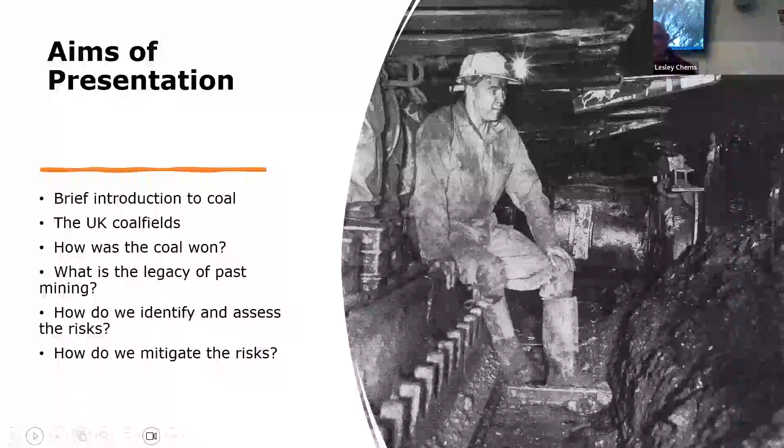All right. So I'm going to talk to you today: brief introduction to coal, where the UK coalfields are, how the coal was won, what is the legacy of the past mine workings across the UK, and particularly in South Wales, obviously. How do I identify and assess the risks, and then how do we mitigate the risks?

So the basic question, what is coal? I'm sure most of you know, but there is a member of our esteemed government who this week demonstrated that he doesn't really understand what coal is. It's a sedimentary rock formed by compression, lithification of organic materials, and this is the bit which that gentleman didn't seem to understand, over millions of years. UK and American coal is obviously from the Carboniferous period, which I'm sure many of you know, but it's not like that across the whole of the world. In Australia, for example, the coal is Permian.

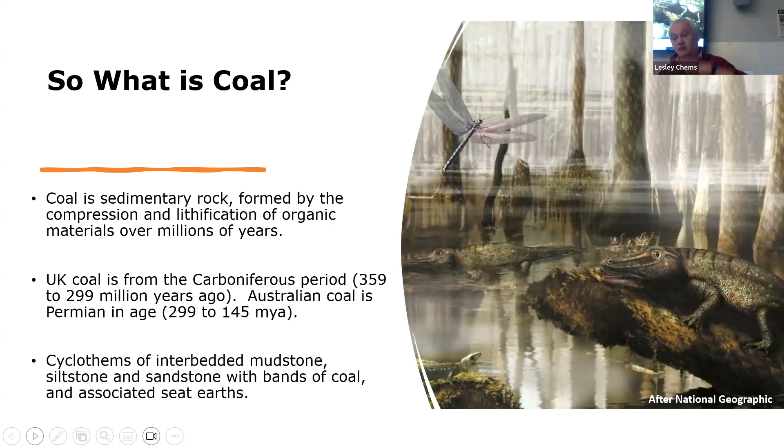The coal was laid down, the plants rotted, and then covered by sand, mud, silts. So you have an interbedded sequence of mudstones, siltstones, sandstones, the coal seams, and also seat earths. Now, seat earths were underneath the coal seams, and they're effectively the topsoil that those plants grew in. But those were lithified as well. You still see those in the succession. A whole sequence of those. So you have a series of what are known as cyclothems, one above the other in this succession.

I was at a webinar earlier this month, or last month, and the guy giving it said, oh, coal's coal. That's not true. There are four main ranks of coal. Lignite, which is soft brown, combustible, sedimentary rock. It really is just one step up from peat. It's the lowest rank, lowest heat content. We don't deal with it much in the UK, but places like Germany, there are quite a lot of lignite seams. Subbituminous is the next one up, increased carbon content, higher heat content.

Next one again is bituminous. That's further increased carbon content. It's got a high volatile content, which makes it less good to burn than the top ranks, but it is the most abundant rank of coal. So most coal seams across South Wales and the coalfields would be bituminous coal. Top rank is anthracite. That's the highest carbon content. That's the stuff the coal man used to deliver in the 60s, 70s, and possibly 80s. It's got the highest energy density, the highest ranking, and it is the most sought after and profitable. Now, this matters because when you're looking at a coal seam, if it's anthracite, it's far more likely to be worked.

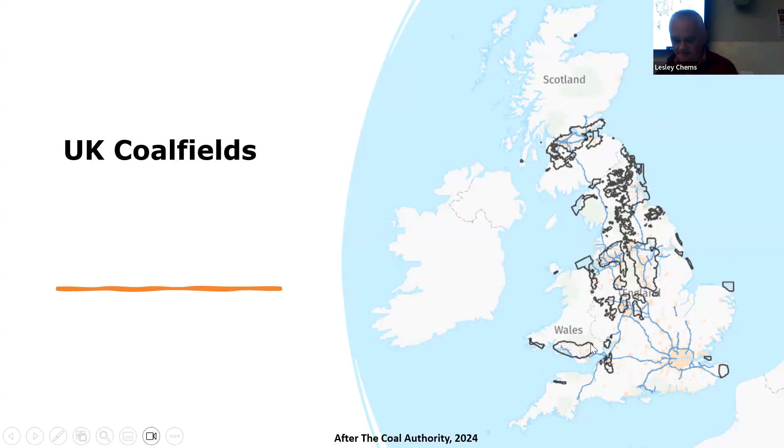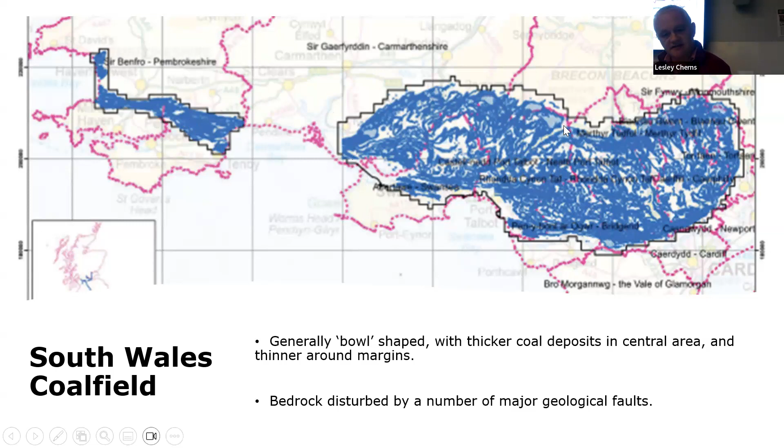There's the Pembrokeshire coalfield over here. It's actually the same coalfield, but Carmarthen Bay has taken a big chunk out of it here. Okay. The coalfield isn't straightforward, though, because it's disturbed quite heavily in places by geological faults. And you can just about see one of the big ones coming through here, and that's the Neath disturbance, a major fault. Just an indication of the number of collieries there were in South Wales in 1893: the larger the circle, the bigger the colliery, the number of workers that worked there.

So I forgot to put my clock on. Sorry, excuse me a second.

Okay. Main thing to look at, that was the 1893 situation. That's nowhere near the number of collieries there are across South Wales. But what it does show, again, is you can roughly see that there are these collieries run in lines following the river valleys.

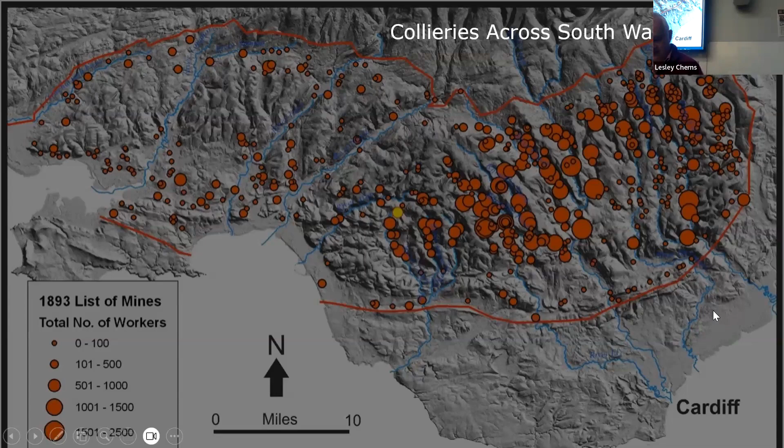Okay, now I don't know how well you can see that. Is that clear? What I've done there, that's a section through the various parts of the coalfield. So over in the west, the Pembrokeshire coalfield, if you remember, I said there were thinner deposits over there, as you can see there are here, and ditto over in Ebbw Vale. But in the central area, this is Llanelli, and this is Pontypridd. This is the sequence of strata basically in these areas.

So what we have is the lower area is known as the lower coal measures, the lower deposits. Then we have the middle coal measures in the middle, and then the top would be the upper coal measures. And you can see there's quite a regional variation across the coalfield. The defined lowest point of the coal measures is the Subcrenatum Marine Band, which is right down at the bottom here. And the top is the pennant sandstones, which occur at the top.

Okay. So you might think, well, why is there a difference here? Well, basically, the coal wasn't laid down in the Pembrokeshire coalfield, or if it was, it's gone. It's been eroded away over the millions of years since. You can see also that the seams go between the various areas. And I've highlighted a couple for you, just to give you an example.

You've got number 2 Rhondda over in Ebbw Vale, which is quite a major seam, quite heavily worked. It's also known as number 2 Rhondda in the Pontypridd area, which is great. But once you get to Llanelli, exactly the same seam, it's not called number 2 anymore. It's called the Wernddu. So the seam names change. The 9 feet seam over in Ebbw Vale, again, it's the 9 feet seam over in Pontypridd. It's called the big seam once you get to Llanelli. But then once you get to Pembrokeshire, it's the timber vein. So it changes. Now, those are regional changes in names, but it's not quite as simple as that even.

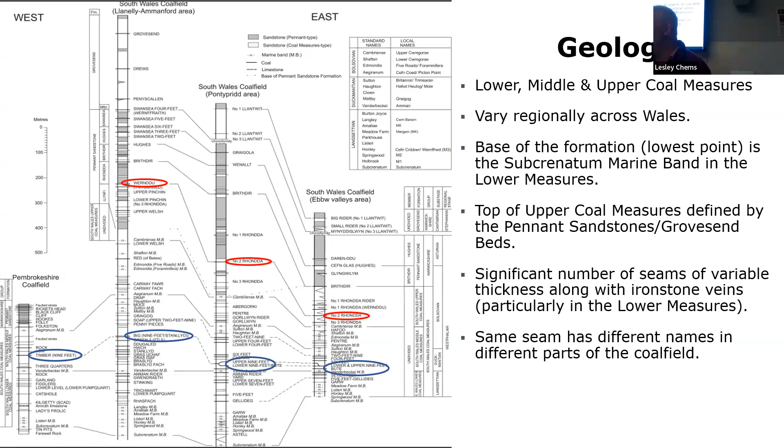Because when you get locally, the same seam can have dozens of different names. Got an example here. It's the Swansea 4-foot seam. Again, heavily worked seam in the Swansea-Llanelli area. In Swansea, you might find records which have Wernffraith, Church Vein, Primrose, Broad Oak. They could be records of those seams. They're all the number 4, the Swansea 4-feet seam. But when you get to the Llanelli area, I'm not going through all those names, but you can see there is a huge number. That's the same seam. Different records of workings in that seam will have those different names.

Two I want to point out as well are the Rosy and the Fiery. Now, those are two very well-known seams in the Llanelli area. The Swansea number 4 feet is called those in different areas, but also the Rosy and the Fiery are names for other seams as well. So if you end up with records of the Fiery seam, you've got to know whether you're talking about the Swansea 4-foot seam or whether you're talking about another seam altogether. It's a minefield, literally.

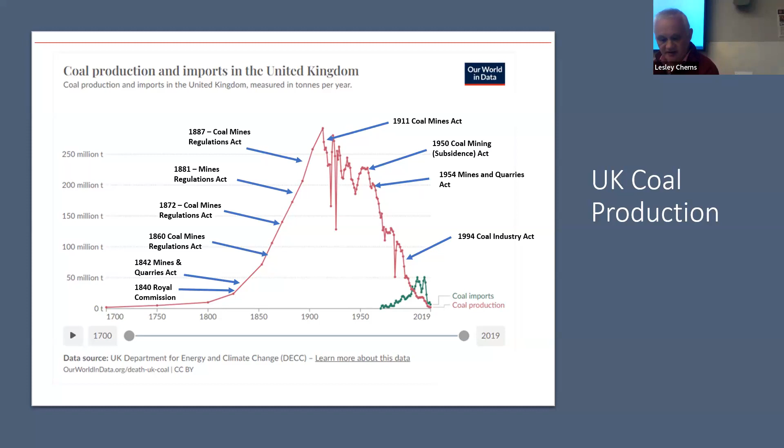In the 18th century and early 19th century, collieries were an incredibly dangerous and hazardous place to work, as you're probably well aware. It was so bad that in 1840 the government ordered a royal commission, and that came up with a huge number of recommendations to make improvements. The first one was the Mines and Quarries Act of 1842, which prohibited women, girls, and boys under 10 working underground.

Before that time, boys were extremely valued because they were small and they were able to get to seams and workings which were very, very narrow, very low height, so they could get to places adults couldn't get to. They were very valued, not for their lives, but for what they could do. The other thing that came in with 1842 was for the first time collieries and mine workings were tested for mine gas, which can be hazardous, and I'll come on to talk about that a bit later.

In 1860 and 1872, two Coal Mines Regulations Acts both improved safety rules. 1860 raised the age of boys working underground from 10 to 12. 1872, pit managers were required to be trained and qualified. Believe it or not, before that, they didn't have to have any qualifications or any training at all, hence the number of accidents probably.

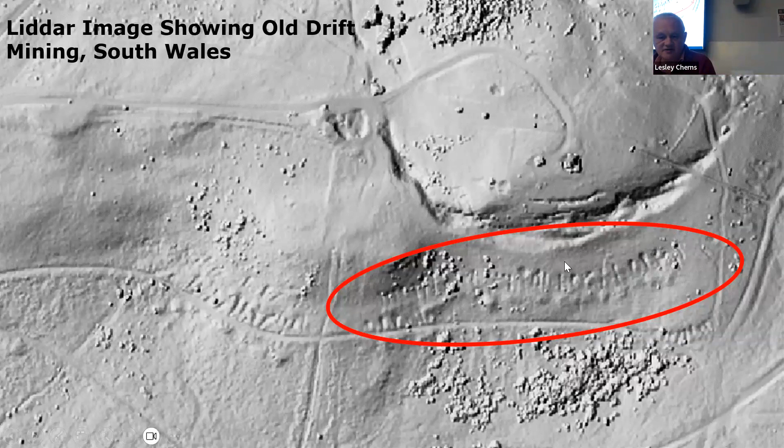After drift mines had got going, the next method of getting underground was something called a bell pit. Now, bell pits, as you can see, effectively are a narrow shaft, maybe 1 to 1.5 meters diameter, going down to the coal seam. When they got to the coal seam, they then widened out in the workings, and hence the sort of bell shape, hence the name. Generally, they occurred where the coal was relatively shallow, and generally not very common at depths of more than 10 to 15 meters. And they formed along the line of the coal seam.

The limitation on the size of the bell pit underground here was basically, again, as I said earlier, the roof support and being able to support the roof. In the early days, they probably wouldn't have been able to go very far at all. But then using wooden pit props and things like that, they used to be able to move a little bit further. And as these chambers got wider, the separation of the shafts, so the bell pits, increased. Okay.

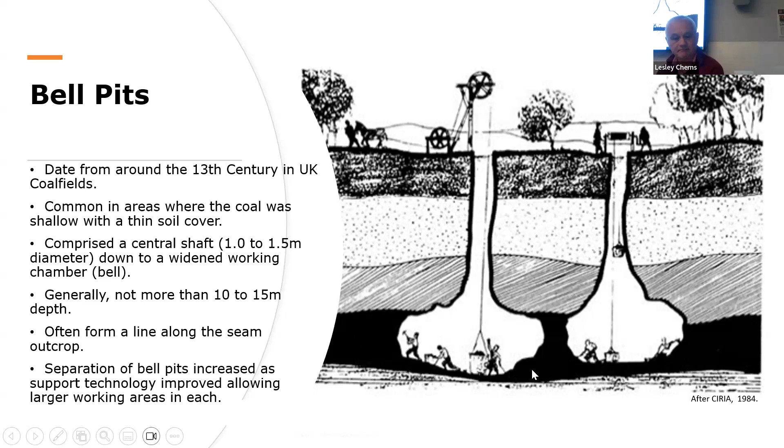This is a drone image of a site, I think it's in Leicestershire, and that is not a buried Connect 4 board. That is a whole series of bell pits, the entrances. You can see over on the left-hand side, the shaft entrance. And here's the pit props just supporting the roof down here. Now, this is an image I got from a webinar that I attended, so I don't know much about this site at all. But looking at the close proximity of these bell pit shafts, I would say this is a very early set of bell pits because the chambers aren't very wide.

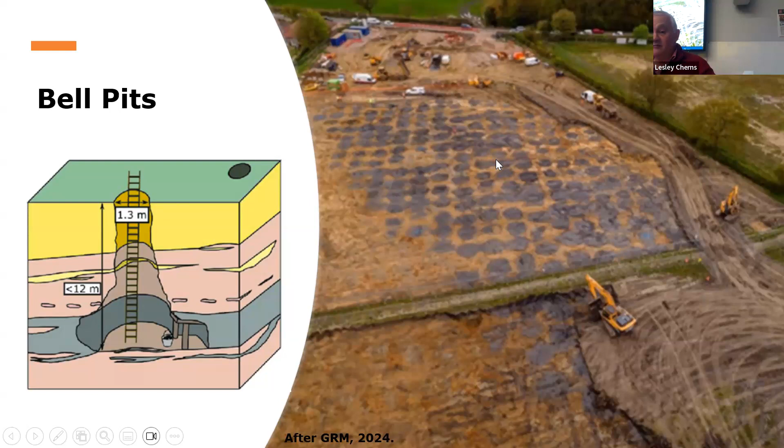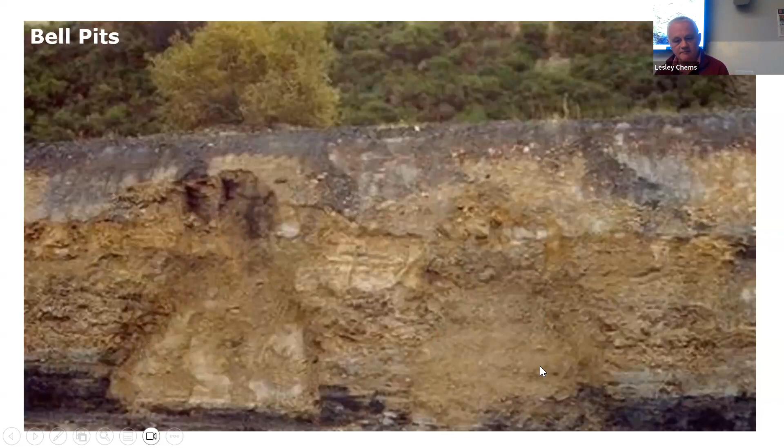And again, just an image showing sections through some bell pits in a cutting. So this is the actual chamber here, and the shaft would have gone up there. Another one here. And obviously all been filled in by the soil over the years.

Bell pits then, as they extended and went further away and roof support technology improved, developed into pillar and stall mining. It's also known as stoop and room, bord and pillar, room and pillar. There's half a dozen other names for different parts of the coalfields across the UK. In South Wales, it's generally pillar and stall. And the way these operated was they left pillars of coal from the seam in situ to support the roof. So they mined out in between these, and you ended up with this sort of net type pattern.

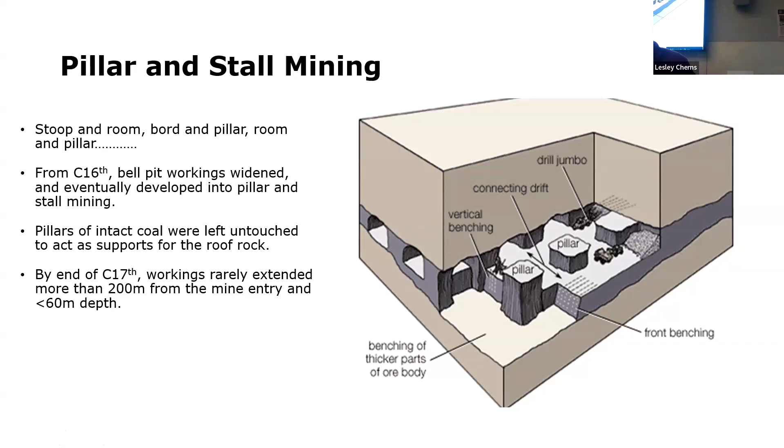So if it was a friable coal, it wouldn't be able to support, it would collapse, so you'd have narrower rooms between the pillars. But also the roof rock: if you had a massive sandstone immediately above the coal seam, that would act as a concrete slab and would span quite a large distance. So there you might have stalls 4 to 5 meters wide. Generally, in my experience, they tend to be 2 meters, 3 meters at most. Now, most of the mine working legacy that we end up dealing with nowadays is pillar and stall. Okay.

Now, in early mining, when they were taking the coal out, they also had to take some of the roof rock out. They may have taken some of the floor out just to be able to get in and around. So they produced a bit of waste rock. Now, in the early days, that was basically just stuffed into old workings they weren't using anymore, what we call stowed. And quite often if we're drilling now, we'll find backfilled workings. Well, not backfilled, they're just waste stuck into it.

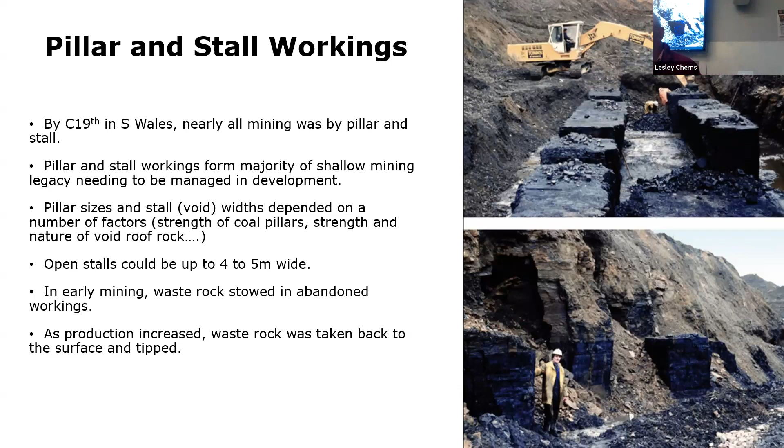As you can see from the photographs, pit props still used to support the workings. You've probably heard the term that Nelson's Navy was built from oaks from the Rhondda. I don't know if you're familiar with that term. Well, I'm not sure I agree with that. I think most of the oaks in the Rhondda went underground as pit props.

And on the right, these are photos from a site in Swansea. That's the actual workings. So you've got pillars. They're totally degraded, as you can see, but that gives you an idea of what it's like. We drilled into them and stuck a video camera down there and got some pictures, which are quite interesting. And those are the voids we have to deal with now because of the workings.

Now, when the colliery came to its end of life, whatever reason that was, whether they'd run out of room, they got to groundwater and they couldn't go any further, whatever it was, when coming out, they didn't care about the roof staying up anymore. So what they used to do is, as they came back out, they robbed the pillars of coal. They made the pillars narrower because they didn't care if it collapsed behind them.

And typically in Llanelli, as an example, as they went in to the workings through the coal seam, they would take out about 30% of the coal and 70% of the coal would be left as pillars to support the roof. But when they came back out again, they would take another 30% from those pillars. So you end up with 60% voiding in the Llanelli area in some places.

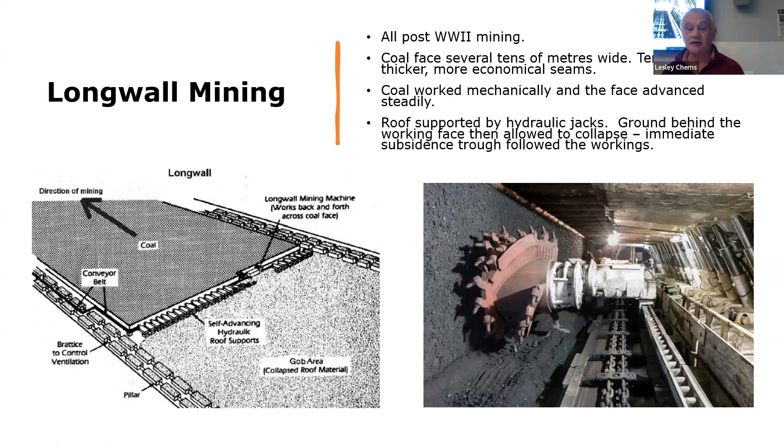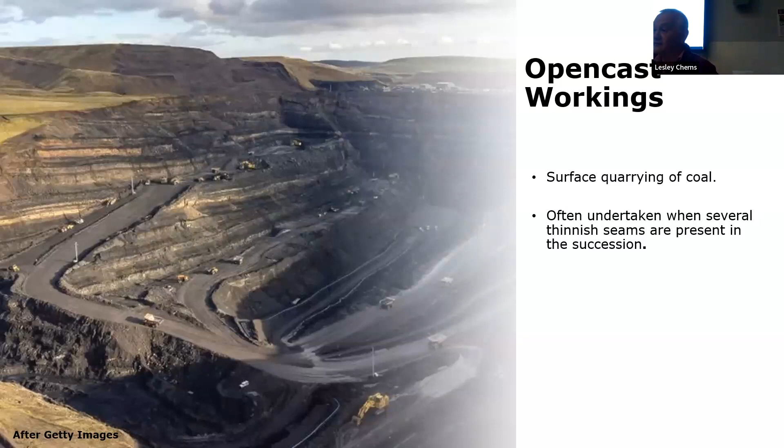And the final way of getting the coal is, of course, open cast, which is just basically a large quarry. This is up Merthyr Tydfil way. What this was particularly used for was when you had lots of thin seams of coal that were valuable, maybe anthracite, but they weren't very thick, so they were difficult to work underground. But through open cast, it was quite easy. Just dig a hole, sort the coal out, and there we go.

So mine entries, we talked about drifts earlier. They're also known as adits, levels, slants. And as I say, they were tunnels driven into the hillside, either following the coal seam or driven down through barren measures, as we call them, sandstones, mudstones, siltstones, down to the coal seam. Any coal mining that's happening in South Wales now, it's all drift mining. The Gleision Colliery, which you've probably remembered from about 10 years ago and the disaster there, that was a drift mine.

The other thing drifts were used for was they used to drive drifts from the lowest point in the valley up into the workings, and they would act as a drainage level. So any water that was in the workings would just come draining down and straight into the river, bringing all that lovely acid mine drainage with it.

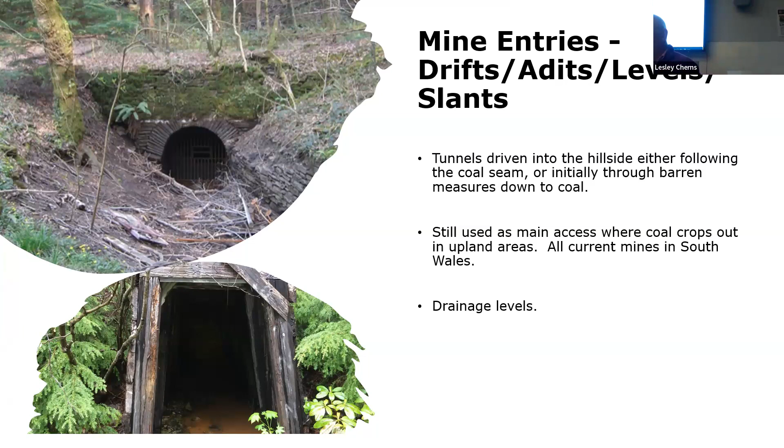Mine entry shafts, mine shafts. Just three examples of shafts here. The one in the middle is a masonry lined shaft. There's a more modern one which looks like it's steel or timber lined. And the one on the left is one we discovered in Barnsley in Yorkshire back in November.

And you can see here's the mudstone. A gentleman dressed up in full breathing apparatus and dropped down into it and was able to take some videos. So we've got the mudstone here, bedrock here, and then the soil above it is supported to stop the soil falling into the shaft. They used to line the shafts. In this instance, it was with brick.

Shafts often started out just as widened bell pit entries. And as I said earlier, often it was just a single shaft, and then Acts of Parliament required two shafts to be used. The benefit of shafts is you could drop one shaft and you could access a number of different coal seams at different depths. And they would be known as different levels or landings, sorry. As you approached each seam, there would be an entrance into the seam, into the workings.

Now, when you had two shafts, they're often known as downcast and upcast. That's nothing to do with getting in and out. That's all to do with ventilation. We talked about mine gas earlier. Again, I'll talk about it a bit later, but mine gas is quite hazardous. So you need to get it out of the workings. So you need good ventilation.

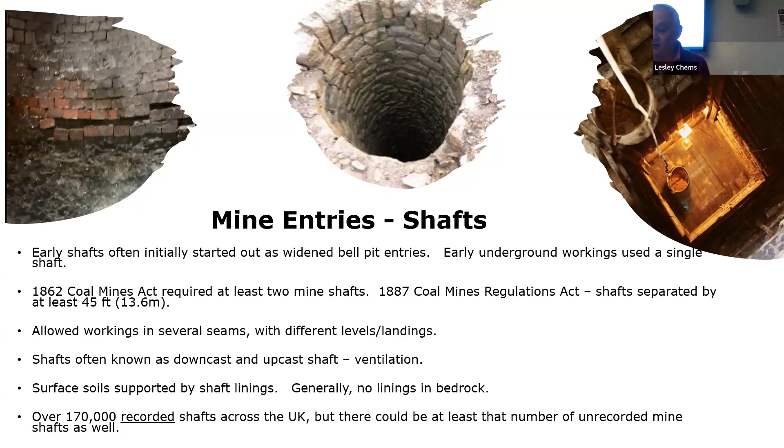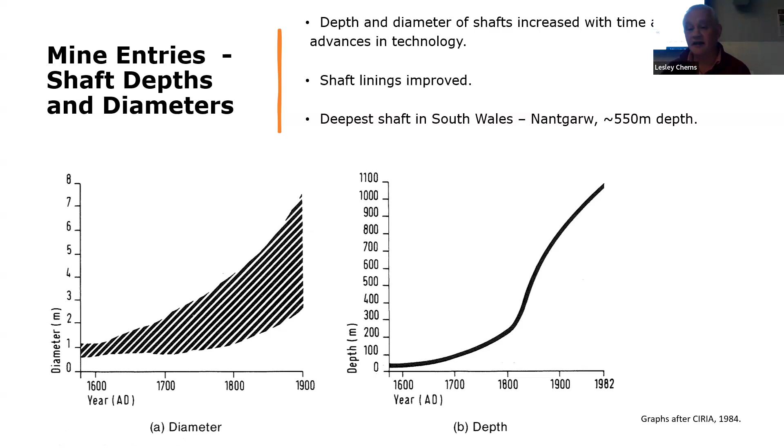By 1980, there were some places in Britain that were going to over 1 kilometre depth, and up to 8 metres diameter. The deepest shaft in South Wales is actually at Nantgarw, up near Pontypridd, and that's 550 metres deep.

That means they want you to do extra work. Why do you have to do extra? Why do you have to satisfy them? The Coal Authority are not only responsible for the coal, but they're also responsible for the workings. And if you have a subsidence issue at your property and it's due to the coal mining, they will pay you compensation, if you can get them to agree that it is mining related.

So what they don't want is any future development to be liable to subsidence. So before they will agree to you getting planning permission, as a minimum in this instance, they would require you to do a phase 1 assessment, which I'll come on to, and possibly even investigation, and possibly even remediation and stabilisation.

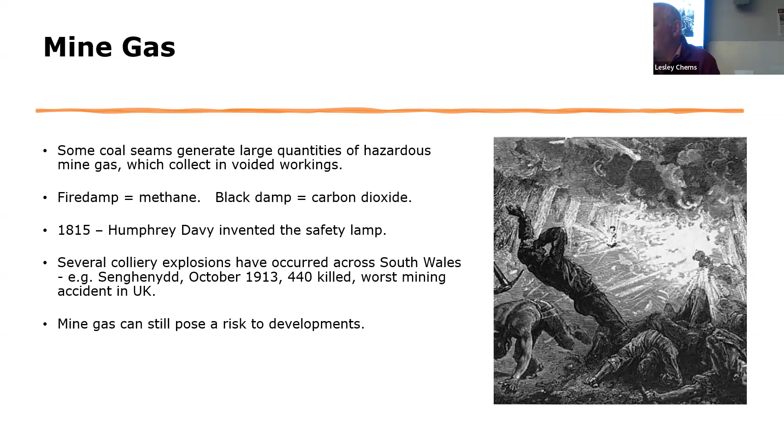They're not underground working anymore, but the workings are still there, the gas is still there, and that gas can still cause a risk, which we have to think about. So how do we assess all these risks? First thing we do is a desk study. It's exactly as it sounds: you sit at your desk and you study various pieces of information. I'll go through some of these quickly.

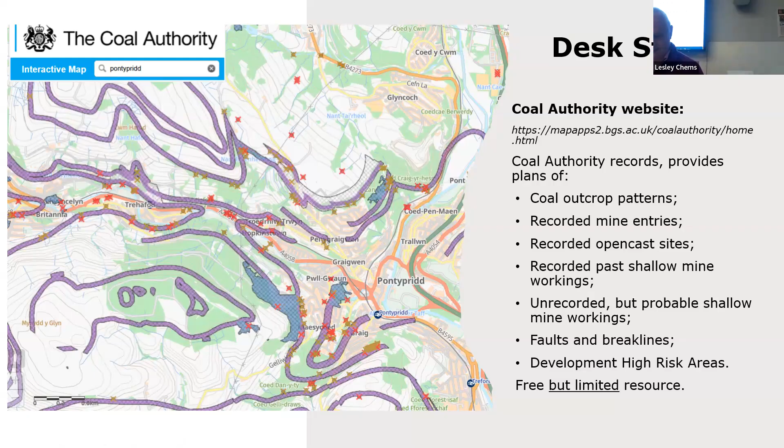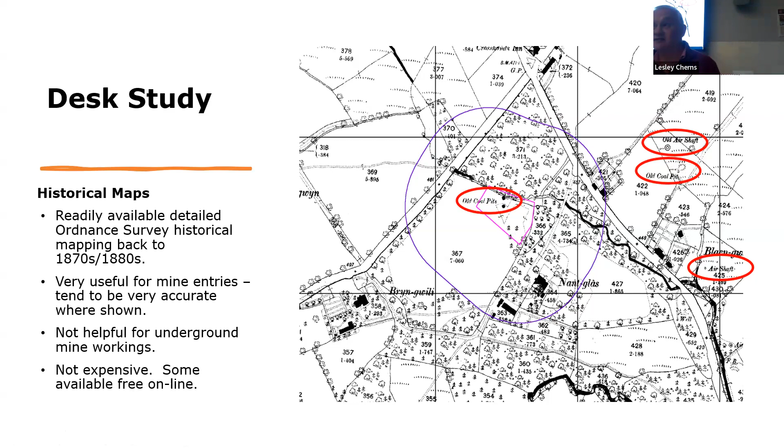If I can work out where that field boundary is and that field boundary is, I've got a pretty good chance I'm going to find that shaft, because it's going to be roughly where it's shown. Not very helpful for underground workings, apart from in general terms: if you've got a mine shaft here, you know there's workings underground somewhere there. They're not expensive. You do have to buy them if you get the full set, but there's lots of places now you can get them within 10 minutes online. Some are actually free online as well.

Geological maps. I'm not sure how many people are familiar with these, but I'm sure you're familiar with the concept. This is an extract from the 1 to 10,000 scale geological map from the Swansea area. For those who know it, Mumbles is down here, and you've got Olchfa School and Gower Road along there. The black dashed lines are where the coal seams crop out, and they're all named. It also shows mine entries, for example, there's a drift which goes into the hillside there.

But it also shows really useful additional information if you know how to read them. I'll use this as an example. The parallel dashed lines that follow up here go up into the hillside. If you know this area, you'll know that this is the Clyne Valley. As you go up towards Gower Road, that's on elevated ground. That's a steep hillside there, and then it keeps on climbing as you go further north.

So these seams here have been worked. So there's mine workings up here. This is, if you remember, I talked about it earlier, a drainage level. So that is taking water from the workings up here and dropping it down into the Clyne Valley and discharging it into the River Clyne.

That's a really useful, interesting feature because, I don't know how many of you know Gower Road, but there's some very nice houses along the side of Gower Road in the Killay area. There's a plot absolutely bang there for about 20 years, was never developed. Why on earth aren't they building on this plot? The reason they weren't building on it is because this drainage level ran straight underneath it, and nobody could convince the Coal Authority that they could build safely without that drainage level collapsing and blocking the drainage level.

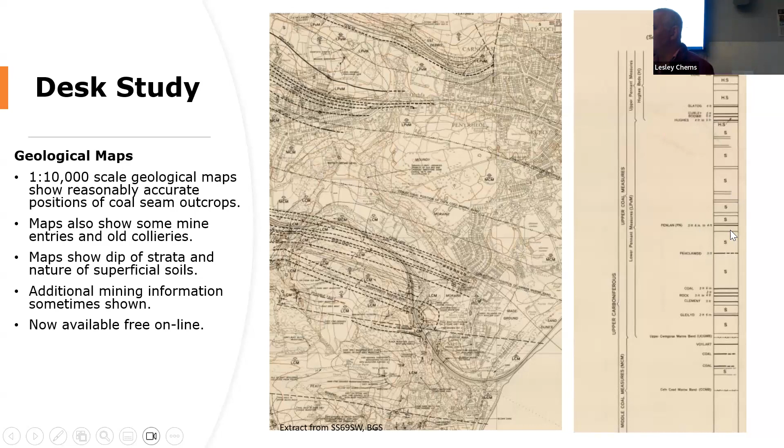The sort of detail included here, this is a shaft section through the Llanharan Colliery. So you can see at the surface, hopefully you can read it, it shows you've got 11 foot 6 inches of drift, that's superficial soils. You then got the bedrock at 11 foot 6. And then it's got the various coal seams going down and the various strata between them. So the 2 feet 9, for example, is at 211 feet 6 inches, and it's 10 foot 4 inches thick.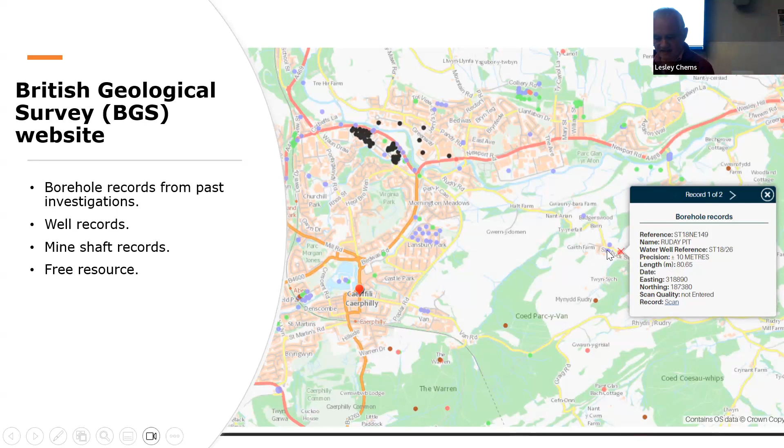Coal Authority Consultants Report. Well, if we're doing a desk study, we will write to the Coal Authority and effectively say, what information have you got for us, please? And they will send us a consultant's report back. It tells us what seams they know are present, what seams they know are worked.

Bear in mind, this is where the Coal Authority have records. They don't have records of everything. I'll come on to that in a second. Now, we talked about abandonment plans, which were the surveys of the plans of the collieries, the underground workings when they finished. They're very useful sometimes, but they are not the be-all and end-all, as I know some people do think they are.

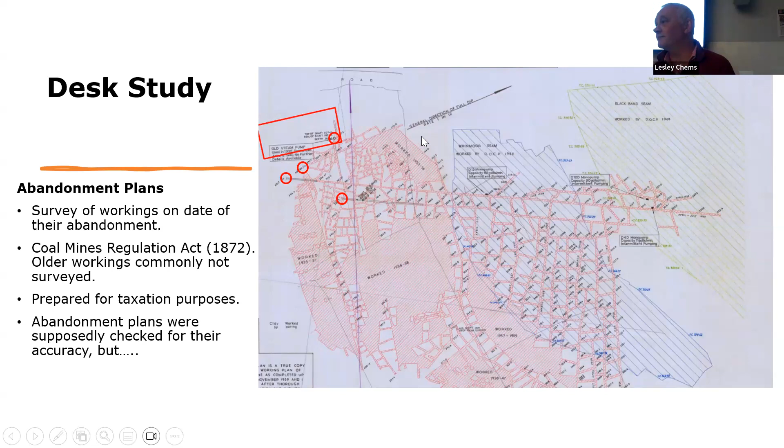And there's other sources, aerial photos, LiDAR surveys. Malcolm Symons' book for Llanelli, absolutely brilliant book for the Llanelli area. Anybody who works in Llanelli, if they're not using that book, they've really got no idea what they're doing. Arups in 94, I think it was, did a survey of Swansea and Llanelli. And if you remember the earlier slide where I had the different seam names, that was taken from the Arups report.

And there's a gentleman called Ray Lawrence, who I think lives Abergavenny way, Eastern Valleys anyway. I think he was a former mining surveyor. He's made it his life's work to write little self-published books on different collieries across South Wales. If you're working on a colliery, Marine Colliery, for example, is the example I've got here. We did some work on Marine Colliery. There's stuff in this book that isn't anywhere else. I don't know where he gets the information from.

And one example on this, we knew there were two shafts on the site, as you would expect from what I've told you already. But there were stories that there was a third shaft as well, and we didn't know whether that was true or not. Ray Lawrence somewhere found an extract from the Times of London newspaper from 1912 or sometime. And it was actually recorded, opening of the third shaft at Marine Colliery.

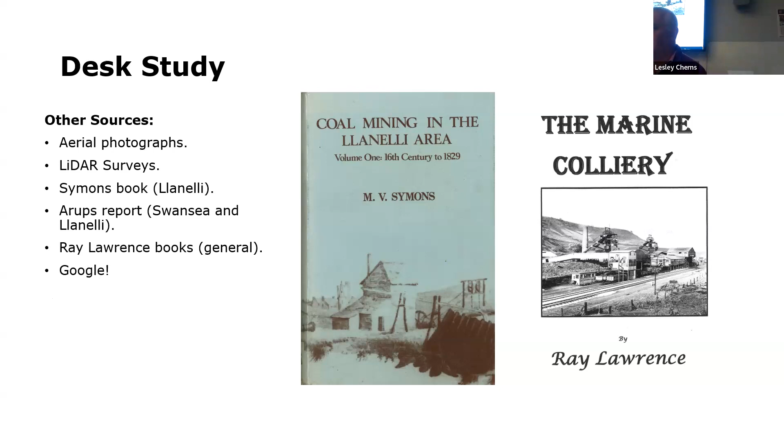So why do you do this? Well, the whole point of doing all this is to do a phase one conceptual ground model, get an idea of what we're expecting in the ground. Consider all the information and understand the likelihood of a particular seam being worked. So if you can find out, as we talked earlier, if it's anthracite, is it bituminous, understand whether it's likely to be worked. How thick are the superficial deposits in the area? Be aware of potential unrecorded mine workings and mine shafts, but also beware of red herrings.

I'll give you an example of a red herring which somehow has got itself lodged into Coal Authority records and now, if you don't know better, you think it's an authoritative source. Back in the 1970s, I think it was, there was a surveyor in the Ammanford area who used to get called out on a Sunday morning, phone call, we've got a mine shaft open up in our field. Oh, okay. And he had to go out and have a look at it that Sunday afternoon. And he got fed up of going out there without any information at all.

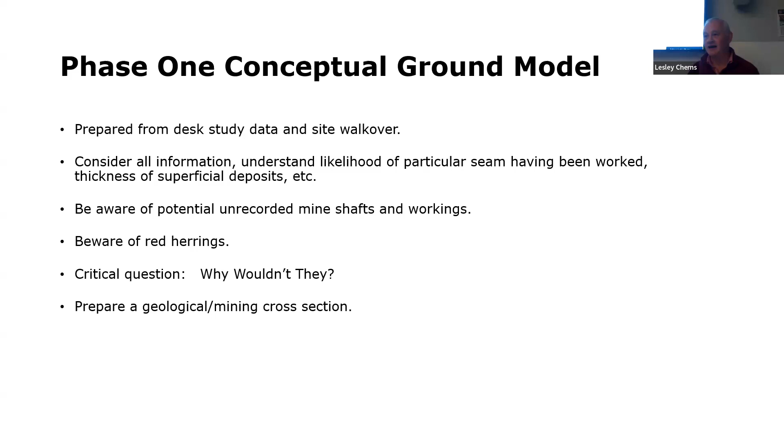And Susan will tell you this, my question always to the junior engineers is if you've got a coal seam crossing your site and it's thick enough to be worked and it's anthracite and it's worked somewhere else in the area, why wouldn't they have worked it if it's accessible? And that really has to be the question.

Very useful locating mine shafts, mine entries at shallow depth. Once the entries are deeper, say they've been covered by 3 or 4 meters of soil, it becomes less useful then. And they may not work in certain circumstances.

We've got a site in Cross Hands where there's mine shafts beneath the site. They're on Ordnance Survey maps. We know exactly where they are, but you can't use geophysics to prove that because back in the 70s, somebody put a sewer straight across the top of the mine shaft, and that sewer will completely throw the physical properties of the ground, and the geophysics will just see the sewer, it won't see anything else. And geophysics has to be confirmed by intrusive investigation.

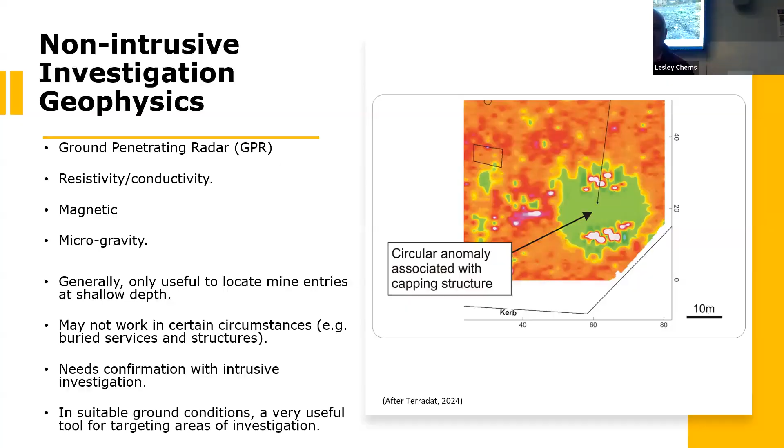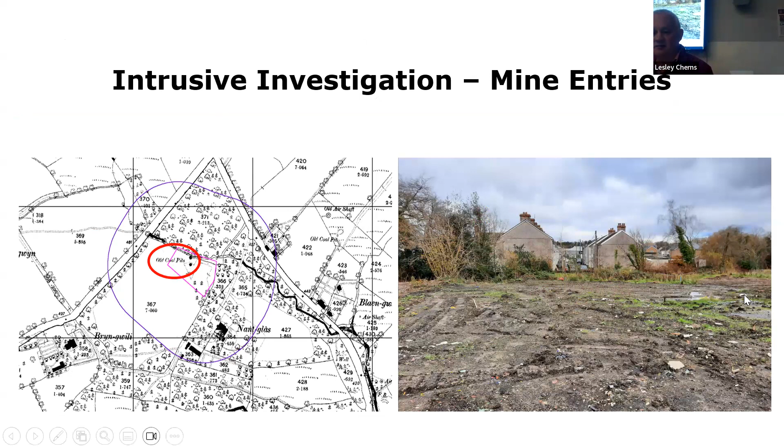It's the site in Cross Hands I just mentioned. There you go. So you can see the 2 mine shafts we knew about. They're in here somewhere. Can't see them, because somebody's done site clearance and any evidence on the surface will have been stripped away anyway. But as I said, there's 2 mine shafts, there's 2 sewers crossing the site. So how do we go looking for them?

It's essential that they're deep enough to prove natural ground and not go into fill and made ground on the surface, because you won't see anything in that. You're looking for direct evidence, but also indirect evidence. This is an example of a site near Llanelli, and this is an extract of that site from Malcolm Symons's book I talked to you about earlier. You see the Clyngwernen Pit, it's highlighted in red.

We tried to find that mine shaft, we couldn't find it, didn't know where it was. We trenched, there was a lot of made ground in the area, so we had difficulty getting to the natural ground to actually see the shaft. So, and I'm going to take the credit for this because it was my idea, I noticed that the Llangennech tram road doesn't go anywhere else except straight to the mine shaft. So we did some trenching down in this area here, and we found the tram road.

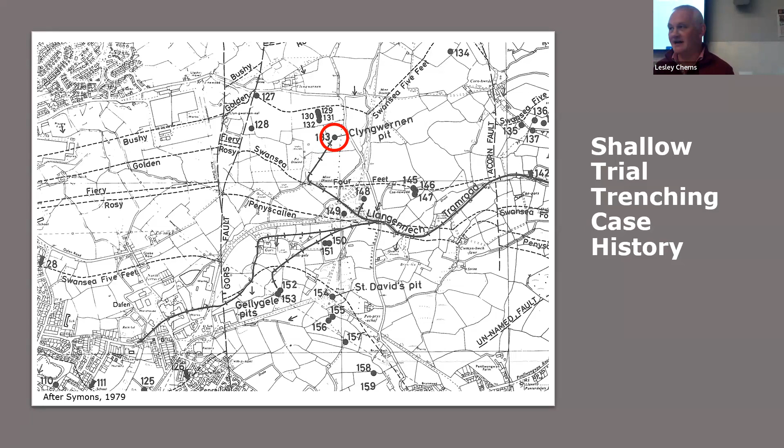We actually found the rail tracks. So we followed those rail tracks, and guess what was at the end of it? A 6 foot by 6 foot mine shaft, which we were then able to deal with. And we dealt with it successfully because Dafen Crematorium is built over it now.

Trial trenches are great to find the mine entries, but when you actually find a mine shaft or whatever, you need to know how deep it is. We know exactly where it is. We can see it on the surface, but how deep is it filled? Is it filled all the way to the full depth, or is it only filled partway? So we drilled rotary boreholes to try and find it.

These are very dangerous. They could collapse at any moment. So we use a steel grillage, which you can see here. And that basically spans the shaft. The rig sits on it, the drillers sit on it. So if that were to collapse, they're safe. They're stood safely, okay.

If we can't see the shaft like that, and we don't know where it is, we might use a drilling pattern similar to this, where that's where it's shown, maybe on abandonment plans or whatever. We can't find it there, so we then drill in a sort of pattern like this, and eventually, in this instance, you would find it there.

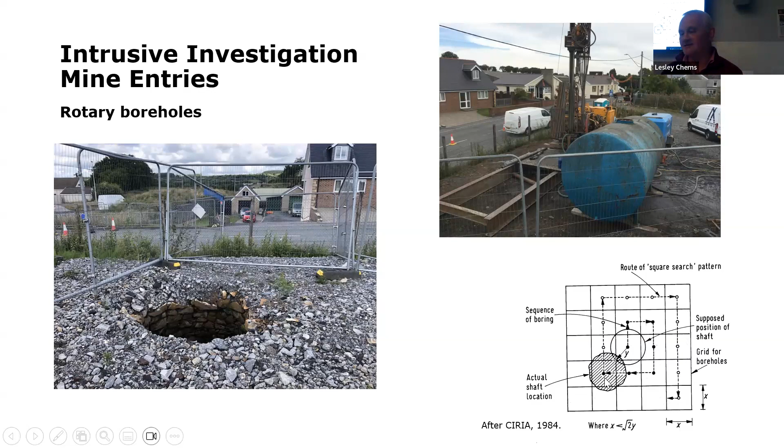Away from mine entries, what about shallow workings? Well, we use exactly the same sort of drilling technique, rotary drilling. Depths and locations of the boreholes will depend on the conceptual model we looked at earlier from our desk study. Generally, we drill to about 30 to 40 metres in South Wales. Absolute minimum of 3 holes, because you need 3 holes to be able to get a dip on the strata. You can't do it from 2. You've got to do it from a minimum of 3.

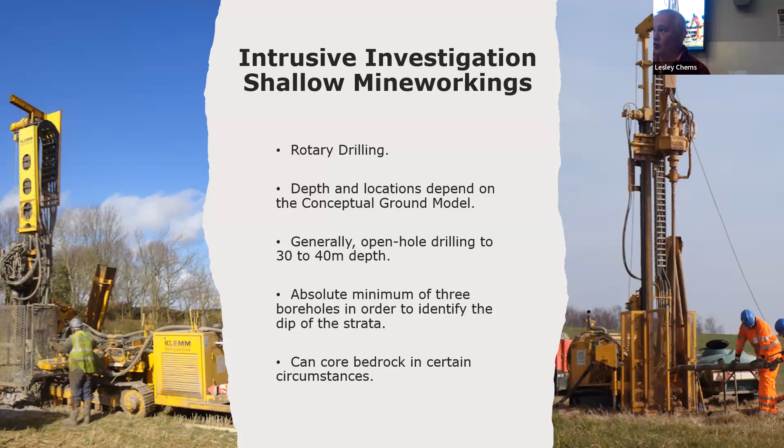Normally, we use what's known as open hole drilling, where you literally drill, you get chippings back at the surface and you can tell what you're going through. And if you hit voids, the drilling rods just drop. But we can core the bedrock in certain circumstances. And I have done that in a site in Bath above underground stone mine workings in an attempt to understand what the likelihood of subsidence was and collapse.

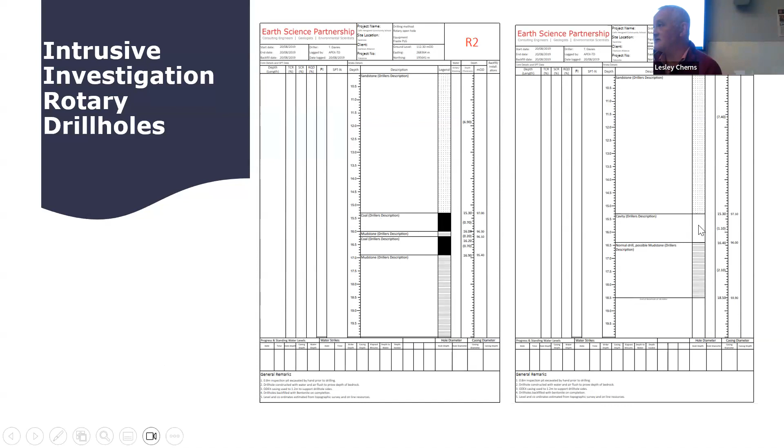End up with borehole records here. Just a couple quickly, you can see we've got coal seams here, and then there would be a cavity here, for example. And we then improve our conceptual model with a section, and so it's a better model now. It's better. This is the site in Cross Hands we talked about.

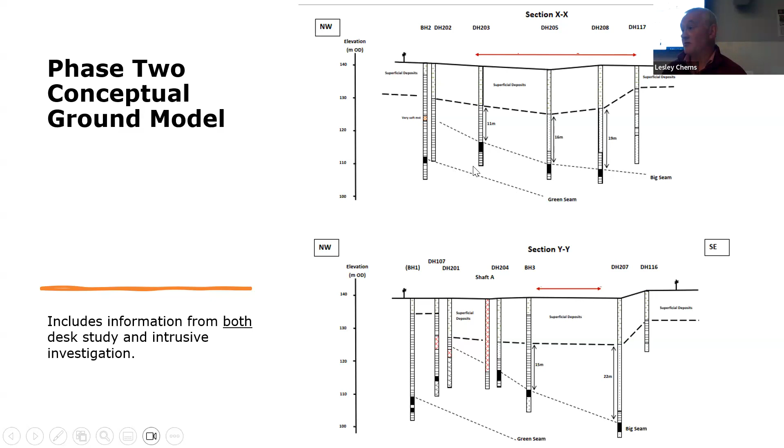It's important that you don't just rely on the boreholes as well. You have to keep the desk study information in mind. A previous company working on this joined that seam and that seam up and said, oh, we've got a sub-horizontal seam here. But the desk study said the strata in the area is dipping at 25 degrees. So the model, we worked at this, and lo and behold, we found workings up here as well. So you've got to be very careful interpreting this information.

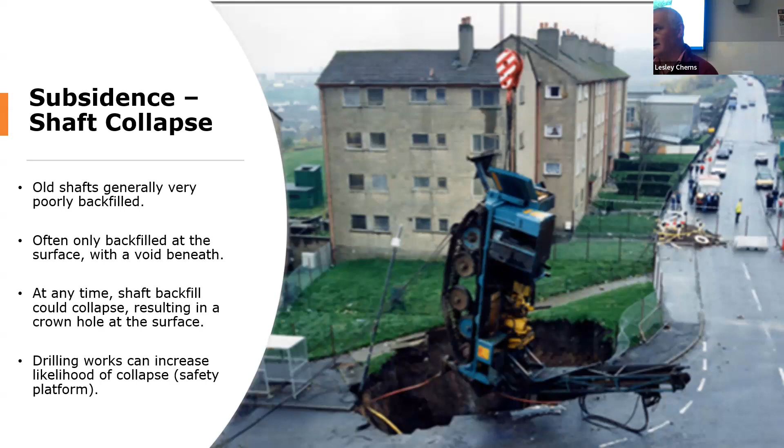So underneath that dram, underneath those timbers, is a void. That void could be 200 metres deep. Now, at some point, that dram is going to rust, that timber's going to rot, and they're going to give way. And then the whole lot is just going to go boom, and suddenly you end up with a collapse at the surface. And drilling into fill like this can actually increase the likelihood of that, hence why we use this safety platform we talked about.

So away from mine shafts, just a quick cartoon on how subsidence occurs. So you've got pillar and stall workings here, you've got coal pillars, you've got the voids. At some point, because of oxidation, weathering, water, the roof collapses. So the bit that was there is now lying in a pile on the floor. So the void, as you can see, has effectively migrated up towards the ground surface. That happens again. The void migrates even further. In these two instances, it's unlikely to happen in reality, but just to demonstrate a point.

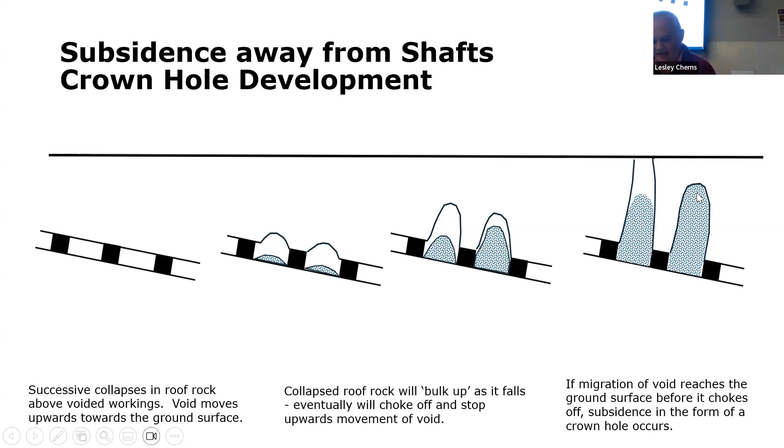The roof rock that's collapsed here, in this one, is bulked up. It's occupying a bigger volume than it is in this one. The collapse continues. In this instance, it reaches the surface, you get a subsidence crown hole at the surface. But this one, because it bulked up more, the crown hole is actually choked off. So the void has effectively disappeared at shallow depth. That's never going to reach the surface. You're not going to get subsidence above that. How deep do workings need to be to prevent that happening?

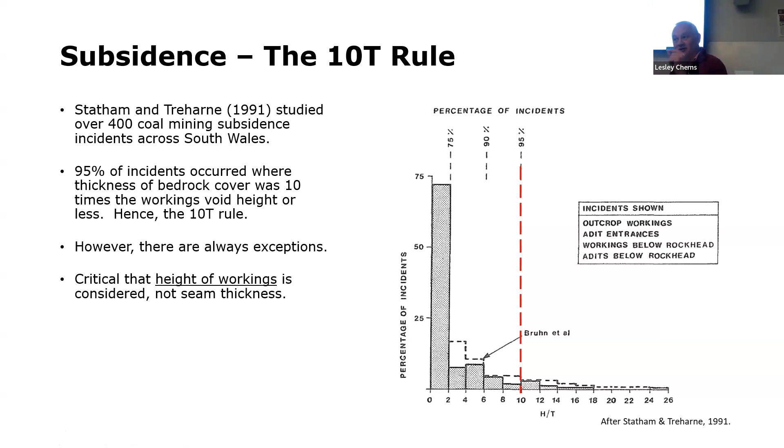Well, quickly, Statham and Treharne in 1991 did a study of subsidence collapses, and determined that 95% of the incidents occurred where the thickness of bedrock cover was 10 times the workings void height or less. So if your void height is 1 metre and you've got 10 metres of bedrock above it, statistically, it's unlikely that you're going to get a crown hole at the surface. There's always exceptions. And it's critical that you use the height of workings and not the seam thickness.

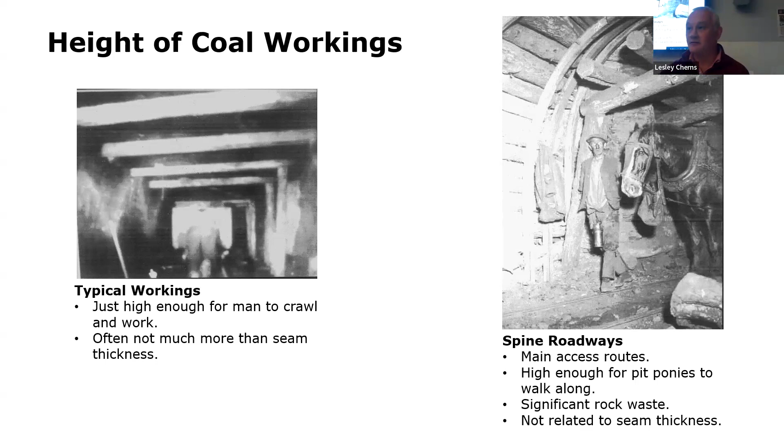It has been brilliant over my working lifetime because we used to go to Aberthaw and get it. It was fantastic. Pretty much every site in South Wales, hour and a half travel time from Aberthaw. Fantastic. Aberthaw stopped working. And now the nearest source of PFA, I believe, is somewhere near Stoke. And if they're not available, it's Warrington. So rather than having 5, 6 wagons of PFA a day, you might get 2 now. It's getting more expensive to deal with these workings because we have to get the PFA from further away.

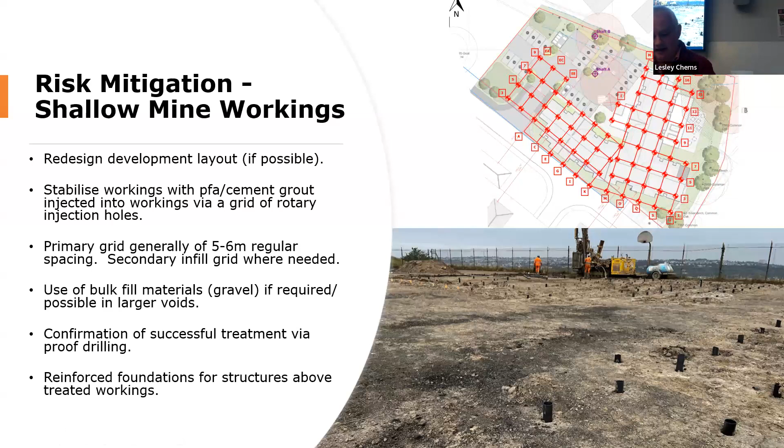You can use gravel if you've got open voids to fill the workings. And then when you've done it all, you would do some test bore holes between your injection holes, because you hope to find grout in them, not open workings. And the other thing you do is you reinforce your foundations for any structures above it.

Mine shafts, how do you deal with those? Again, the easiest thing, just fence them off. If you're in a remote area, just stop people getting near them. They're fine. They'll be all right. If you've got an open shaft, let's say one we saw earlier, fill it with gravel. And then you do exactly as we do in mine workings, we then grout that with PFA cement grout.

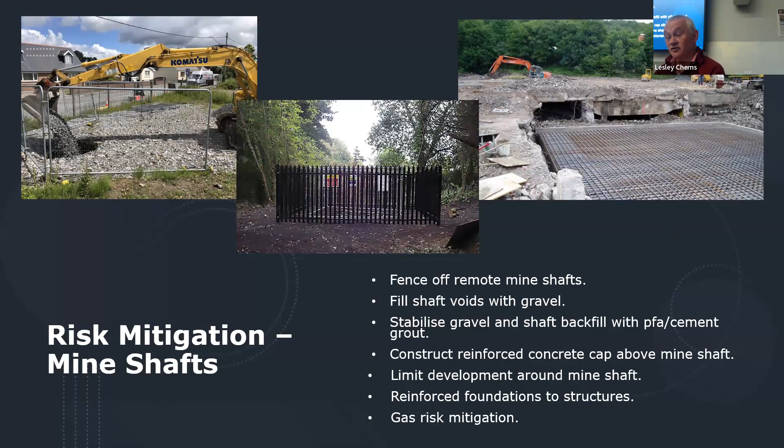And mine gas. Drilling into mine workings obviously can move the gas around. If you grout up the workings, that gas has got to go somewhere. So it moves somewhere else. Rising groundwater filling workings pushes the gas upwards, and gas, methane in particular, will rise to the surface. It can collect under new structures you put in. So you put gas mitigation.